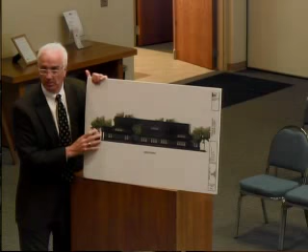And then you can see along here, all this cedar shake-like product is actually Hardie-like, a cementitious fiber board. It's very tough, very resilient to moisture, insect penetration, and UV exposure. It's very resistant to UV. So it's very, very tough, very sustainable, and very easy to repair.

The roof is asphalt shingles, a 40-year dimensional shingle. We're going to be putting several layers of insulation in this roof. Our R-values are going to be almost 40 in the walls and probably close to 55 to 60 in the roof. As we mentioned before, there were also some concerns about where the condensing units were going to be.

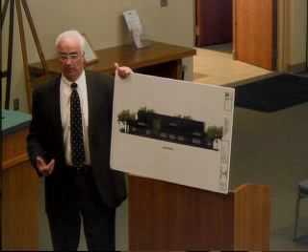This is going to be totally geothermal driven, so there won't be any condensing units outside. It's a very quiet, efficient operation with closed loops, so there won't be any moisture or fluids coming in and out of the system. It's a closed loop system. We'll probably have 6 wells, 350 feet deep, that will circulate glycol and coolant within the equipment itself.

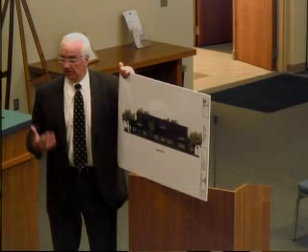If it does break open or anything, it's water soluble. It evaporates almost immediately, so it's a very safe and nature-friendly product. I think it's going to work out really well there.

We did try to make sure that we addressed a lot of the concerns that there were for the landscape plan. We did update some of the plantings to get a little bit closer to the target.

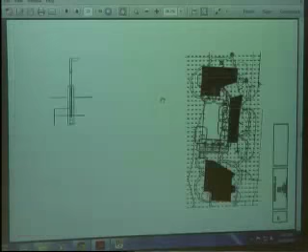You can see over here in the lower section on the bottom, on the southern portion of the site, a lot of these trees, if you notice on the aerial photograph, are in place as existing foliage. We think that's a very effective screen along there.

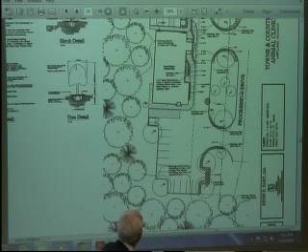On the Progressive Drive side, we have added several arborvitaes and boxwoods and some of the decorative deciduous plantings required. As you go a little bit further toward 59 and Highland Road, we did add a few trees as a result of that 100-foot span there.

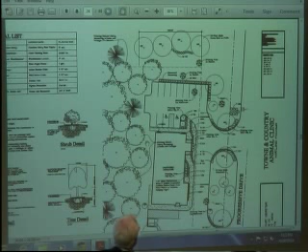We did add some foliage and screening along the north end of the property line near the parking lot, and also along the far north edge of the property — four larger trees that you see there.

We have very good high-quality windows and a lot of thick insulation. It's going to give us a very good R-value, and it's also going to be a very good sound insulator. So we think we're going to have very low impact on the site.

And again, Kurt and Christine are very excited to be a part of it.

Okay, great, thank you.

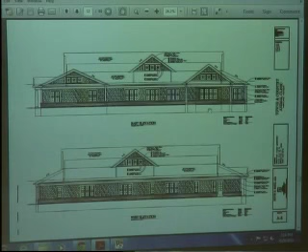If it works for the commission, what we could do is take the planning department's letter of April 16th and just go through the main headings. If anybody has any questions, we can ask David or the applicant, and we'll see if we can get through this in an orderly fashion.

The sample board — I'd like to show you the rendering. I think if you see this, it's a little bit better depiction.

The trim — yeah, this is the... I'm sorry, this is the aluminum trim. This is on the exterior. It's a dark anodized aluminum that's on the outside.

The shake, the hardy shake, will be this kind of sage color here. It's called... I'm sorry, it's called a black fox color.

And the P1, this area here, is actually an outer space color from Sherwin-Williams, but that's the trim color. It'll be on the AZEC and everything.

I'd like you to, if you want, take that and pass it along. Sure. Colors look better than that one. Right.

Okay, do you have a copy of the planning department's letter? I do, yes. Well, if that works for you, we'll just follow along and go through it.

I don't think there's anything really on page 1, it's the basic information. So if we look at page 2, I think Dave and the applicant have done a good job with the site description and an overview of the proposed use being 5,500 square feet. It looks like all the dimensional requirements are being met, including the deferred parking that we'll be talking about on the next page. Are there any questions on that?

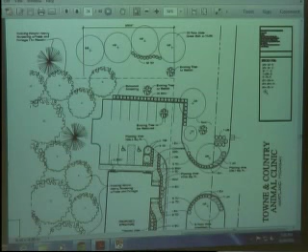So we're talking about the planting right there, the 4 trees. Correct. Per ordinance, the entire frontage is required to have a green belt. What the applicant is requesting is to only apply the green belt requirement along this area and have the existing vegetation, which extends further west, be applied toward satisfying the intent of the green belt requirement, in lieu of possibly taking down existing vegetation to put in new vegetation.

Comments? I have a comment. I agree, saving the existing vegetation, because it's a large mass, seems to make a lot of sense rather than just landscaping with the 4 trees you have in this area.

But the 10 yews behind that, I know we have this other need for large shrubs, or ornamental trees. The intent is just to have this naturalistic pattern, and by doing that kind of wiggly row of yews, I find it's just not really appropriate at all for the site. I was hoping maybe to meet that intent there could be a better solution than just randomly putting that little wave of yews. It just doesn't seem to go with the rest of what's out there.

Just a comment. Any suggestion? Well, I know the other option would be to put in some larger scale ornamental trees. I think because you've got this large mass of the large wetland tree mass, plus these kind of scattering out, something larger in size would be more appropriate than having just this little decorative, small yews. Even quantity-wise, I don't know how we want to play it, but I think it would be far better to have a couple of those versus 10 of these formal little yews.

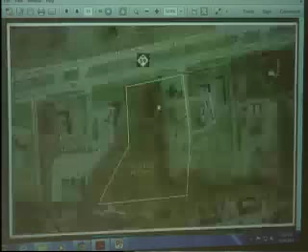Yeah, you see the one here, along this area here, our driveway - if you look at the way our building is, the parking probably doesn't extend much further than what's here, but you can see all this area here is very thick. This sort of shows the vertical, taller trees here. Below here, probably from 18 inches to 6 feet, is heavy foliage and bushes, and even right now it's very difficult to see anything along here, especially on our property. We do have a little bit of screening coming out towards the street as our landscape plan shows, but the distance from here to these residences is probably over 400 feet.

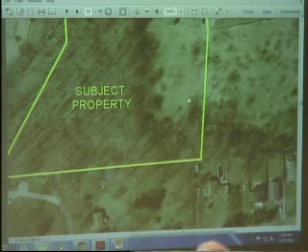I drove in the other day just for the purpose of this application, and I thought it was fairly dense. I wasn't thinking about that at the time, other than knowing there was residential there, how much you didn't see. So that might help answer the question. It's very difficult any time of the year to see a house from M59.

The intent of the ordinance is for a new development with no screening, no trees. They already have natural screening in place. I would prefer to leave them alone, and I think they'll be dense enough and far enough away from the houses, the residents, that it won't be a problem. Actually, the property next door doesn't have nearly the amount either, and there's no complaints there.

And it would be nice to have a place to push the snow. If you got a bunch of shrubs there, it's a little harder to push the snow. You have to tear up the good shrubs that are there, probably some of them are going to go away. And any snow amount at all is going to mound to 3 feet rather quickly.

I did go in there just because I wanted to familiarize myself with the site. I don't remember the house being any issue. Right, and I did too, and it looked way off in the distance. I just thought it's hard to know.

Okay, so parking lot perimeter not visible from the public or private roads. Are we satisfied with what they have on the plan? Does that work for you? I think so. All righty.

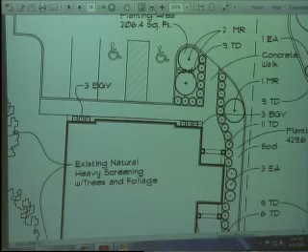Okay, because the next part of our ordinance says it should be 10 feet in width when it is located between the building and a parking area. And that's another part of our ordinance. So there we are, between a building and a parking area, and it says it should be 10 feet in width. Is that talking about with or without a sidewalk?

Not that I can... So if you throw the sidewalk in there, I think the dimensions are changing. Yeah, they are. And I'm certainly not disagreeing, I'm just giving you an alternative, or what our thought process was.

They could potentially—the Planning Commission can certainly consider this—but if they didn't want to have the sidewalk, the alternative would be no sidewalk, but additional foundation landscaping. That's not an ultimatum the applicant threw out there, but we kind of weighed the benefits of the proper width of foundation landscaping versus the provision of a sidewalk, and we thought that having the sidewalk was a benefit.

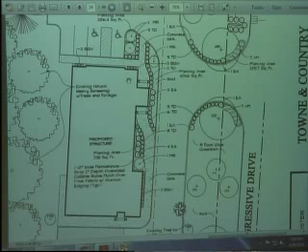And it is a benefit, I agree. I was just trying to follow also what we're saying in our ordinance, because once you allow it in one place, then we're going to hear from another place—they're going to want the same. And I like the open space. I'd rather have the land untouched and leave the footprint smaller, and all the things you're doing is wonderful. I'm just looking at the ordinance, trying to understand when it says it's been met. I'm not seeing that, and maybe this is fine. I mean, all around it, it's wonderful.

We, as a staff, could have explained that better in the building foundation section, and that's on us as a department. There was a relatively quick turnaround when the plans were received, and to the applicant's credit, they worked with us on getting some issues cleaned up on the landscape plan on relatively short notice. But there was a quick turnaround in getting the landscape plan reviewed, and so those items we could have explained better—my best explanation for why they didn't get explained better is trying to get this turned around as quickly as possible and get the agenda packets out.

Dave, is there a green belt at all between the sidewalk and the building, that little segment, or is that sidewalk right up against the building?

So these are the boxwoods here and here. And then there's a small band about 18 inches along the entire north end of the building, and two 30-inch planter boxes there.

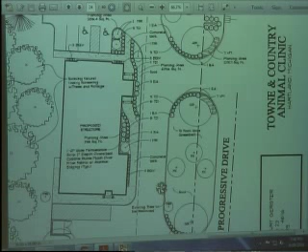I just wanted to bring it to our attention, just because it said it had been met, and I wanted to be clear that this is something we're agreeing to. Okay, are you okay with it? Everybody all right with it? Yeah, I can understand Sue's concern with the ordinance, but I'm comfortable with the adjustments that the planning department gave, and I'm okay with it.

Well, there's a lot of screening in front of it. If you back that print up and show a little bit more of the north, Dave, you've got the whole parking lot screened across there. And either way, you've got the natural buffer that they're leaving, or coming from the other direction, all the way on the other side of the boulevard, you've got that screen. Not sure what the elevations are, but it's certainly not going to look barren by any stretch. I think we prefer it, it's less, like you said, you're keeping your footprint little.

Again, I just wanted to bring it up that it wasn't quite met. Well, and I think when we revised the landscape ordinance, our thought was that we wanted the ability, and we wrote it in there, so that we would have the opportunity to discuss at the planning commission level whether what they were doing met the intent. I appreciate you pointing it out, and I think it's important. It is a discussion the commission needs to have when these kinds of things come up. But I would say that it seems to meet our intent pretty well. Attractive. Yep.

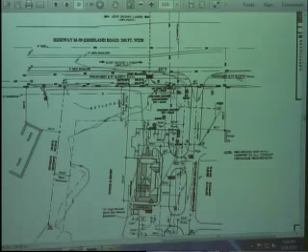And I think filling one more gap along our safety path network along M59—every time we can get one more connection, which we do have safety path existing on either side—now we're filling one of those gaps, and that certainly is an improvement in our non-motorized network that we're trying to build. Right, far more important to have that than the other piece. So, any other comments on it?

I agree with everything you guys are saying. I would just state that if you go a little bit to the west of there, to the office building, it does have a connection to an office that I would say you could probably say the same thing about—isn't really a foot traffic type of building, yet they were required to put one in. Well, I don't know if they were required or not. They have one. But I guess if we have the option, people put that in without us saying to put it in.

And a sidewalk for a sidewalk that no one—I don't believe that use, I just don't think anybody lives close enough to walk their dog to the vet. Doesn't mean it's always going to be a vet building. Well, whatever, but I agree with you—there is no residential close enough for that to happen. You're more likely to have people going for a long walk, but that's not the destination, or a runner. Yep, for sure, okay.

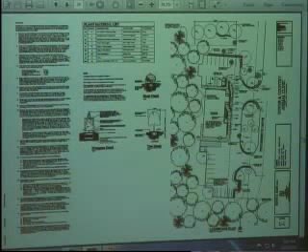That will be a condition. Meeting those landscaping requirements around the base of the monument sign is always one of the things that we review as part of the sign permit for the new monument sign.

I know this isn't our realm anymore, but the only thing I wonder about is that location. If I'm going down M59, given the amount of screening you have along 59, am I going to have a hard time figuring out where your business is? I'm wondering if it wouldn't be better for that monument sign to actually be out towards your M59 frontage rather than back there. That's just my suggestion.

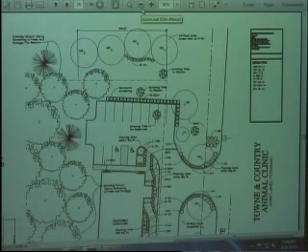It's your choice, not ours. That's just my concern. I could see people going by there and not even seeing this building once all that shrubbery grows in. I guess what he's saying is feel free to move it within wherever you can, and his opinion is 59 would be better visibility for you.

Stormwater management - the notable thing on this one is that this site is within the area of proposed Hartland drain number 5, and I included what that drain may look like someday, a conceptual plan that was done by HRC.

The area south of their site is prone to flooding, which is why it's envisioned as a potential future drain. So as to not contribute to or exacerbate that, the applicant is going to retain all their new stormwater underground. They're going to do underground detention, and the water within those detention bays will, at its own rate, make its way back into the soil.

The engineer has some comments with regards to that. I know they did some revisions per our engineer, and there are some conditions that HRC wants addressed on the construction plans, but their recommendation overall is for site plan approval.

Well, we have several of these in the community. The only thing I remember that we didn't mention here is, don't they have maintenance agreements that allow, or were those just in the PDs, that allowed the township or the drain commissioner to enter if necessary? Do you recall something?

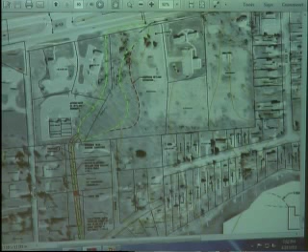But it's going to go to groundwater, not surface water. Correct. By design, it shouldn't make its way down this natural floodplain through here. Okay, well here it is in HRC's letter.

Apologize for not catching it when I read it. It does say, in the general information, all easements are to be in recordable form prior to approval of the as-built plans. They include legal description, sketch of the easements and parcel, and a cover sheet. At this time, the required easements may include the water main and detention basin maintenance agreement.

So it's in the letter. I did read it, it's there. So did I, and I read over it. I never know what the engineers are talking about anyway. It could happen for this parking lot to flood. Right, client, so it's going to be well-maintained. And I've never heard of a problem with any of the ones we've had. But we have no problem with that. If you want to write that, that would be simple. Actually, it's a term of the engineer's letter, and therefore it's already covered. There you go, we're done with that.

Any other question on stormwater? Okay, architecture and building materials. They're requesting a waiver for the wood siding and the asphalt shingles, and the underage of the brick.

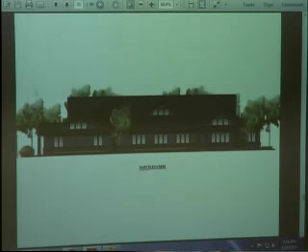You like what it looks like? I like that picture there better than this picture here as far as color. It's a little dark, yeah, hard to read, sorry. Once I saw the picture on the board he had, we really didn't want it to be all brick because we didn't...

The sample board, definitely. The cost for going all brick, there's no cost savings to making it all brick. The cedar shake that we're using is a very expensive product, so it would probably be a wash. The masonry and the hardy plank cementitious fiber cedar is almost exactly the same, about $8.50 a square foot, no matter what.

What we wanted to do is to make it not look like an office building. We wanted to have sort of a residential feel, a little bit more of an organic look. So the band along the base is pretty much to protect the building functionally as well as give it a little bit of protection. The cedar shake, the painted shake, is there to give it more of a residential theme, and it's very tough.

I mean, you can hit that product with a golf club and it won't break. It's very tough. It's made up with cement fiber and wood chips mixed into a molded type of millwork.

While different, this is of similar look to the Brighton Township facility. It still has that characteristic about it that you're carrying across. Different colors, smaller, and that's a pretty good looking building. Craftsman look, to be honest with you. An organic look, that's a great looking facility.

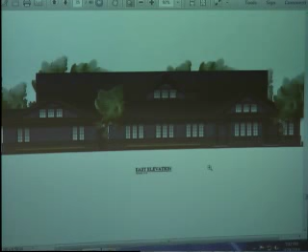And all of this brick along the base, that's the reclaimed brick? Yes, that's the brick sample I brought here. It's called blast furnace slag - what they use to line the interior of the blast furnace steel. It's a neat product, almost like glass. It's melted and torn off of the interior. They lined the interior of the blast furnaces so they could cool the steel, and after a while the brick starts to fail and they just chip it off.

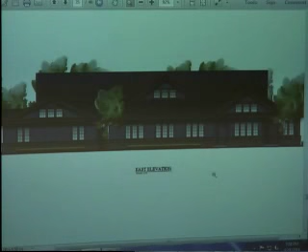Wow, they piled it up all over the Fort Wayne area, and Brick Tech went out there and grabbed it, and they're using it all over. So it's like a standard size brick? It is, yeah, a little bit wider - about 1.5 inches longer than a standard one. It's very attractive, gives it kind of an ancient look. We want it to look like it was there for a long time.

So are we in support of the architectural waiver? A question about the trim - I'm picturing the hardy board. Is the trim around the windows the aluminum material that was on your sample board? Oh, the aluminum is for the window cladding. The windows are wood, but they're clad with aluminum on the exterior, and the inside will be painted or stained.

The trim you see around the outside of the frame, that's AZEK. It's another product that's a little more malleable than hardy plank - it has more of a plastic content so you can form it to be more intricate. So the trim and casings around the window and door frames, we're using AZEK, and it's a little more expensive than hardy plank, but you can mill it better, bend it, and do mitered corners.

With hardy plank, if you try to do a miter it chips and breaks, and it's hard to deal with for intricate casing. So we're using AZEK, which also has about a 100-year lifespan. It's made of melted milk jugs, wood chips, and fiberglass, molded into a long bar stock that has wood grain and everything. So it looks very realistic, and it works like wood, like good sanded wood.

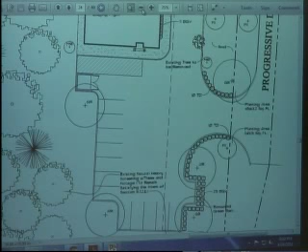Now that circle is when the tree is 35 years old, though. There will be sod around the perimeter, grass around it. Okay, you'll just have to go farther to pick up the trash if it's in some of those other trees out there.

Okay, loading space, nice that you have one, meets the requirements.

Future drain. Dave, any comments other than that? No, just an overview. You'll see when we get to page 9, in the planning department's recommended motion of approval, one of the conditions would be that they include a note on the plan agreeing to a future easement to accommodate Hartland Drain number 5. Okay.

Township Department of Public Works review, he approves it with 3 contingencies. Anything to add to that? I think these are all items that are pretty standard that could be easily included on the construction plans. Okay.

Engineer's review, same thing? He has the same thing. No objections? Right.

Fire department? You didn't even have any conditions? No. He just asked for an address or key box. The applicant did do some significant revisions to the parking lot layout and the proposed driveways in order to address the fire marshal's first review. Originally, huh? Yeah, he did. So I shouldn't say he doesn't have any issues, he doesn't have any issues anymore. All right, you usually see something, so you did a good job.